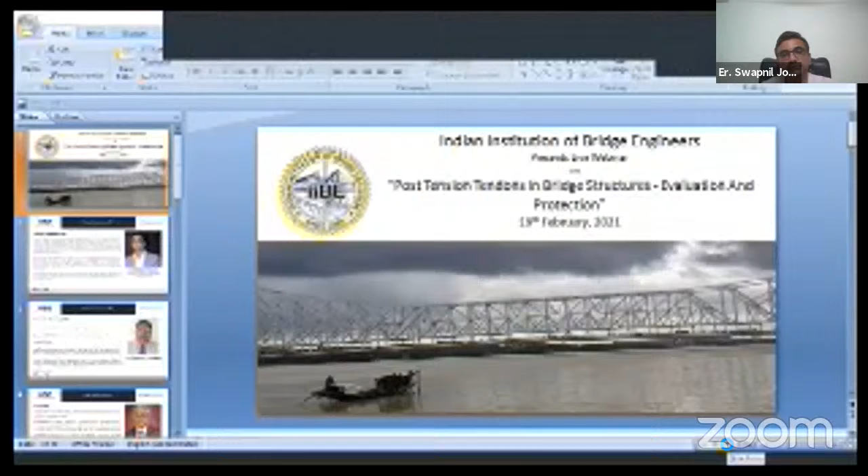So fine, Dr. Pillai, what's happening on the epoxy bars? Sorry, who are you talking to? Dr. Pillai, yes sir. What's happening on the epoxy coated bars? We don't want them, sir. No, there is a fight going on, Vinay. I know, you're telling others. What is it, actually? It's what to do, I don't know. We need to make sure the material we use is of good quality.

Thank you, Swapnil. I hope I am audible. Yes. Okay, so a very good evening to everybody, thank you for taking out your time, joining us, and encouraging us, I must say. We are having a lecture on a very important topic, which you will all hear from Mr. Shah. But before that, a few facts about IIBE. It was established in 1989 by engineer MC Bhide, who retired from railways as chief engineer, and he took the member strength from 1989 till about recently, till when he was alive, to almost 7,000 members. And we are continuing it further. His dream was to disseminate knowledge in the field of bridges, and we are all trying to continue with his dream. He also wanted to have an office of IIB's own.

So also we are purchasing an office here. Over this tenure of about 31 years now, there have been, at the peak, about 38 local centers of IIBE, apart from the head office which is in Mumbai.

There are some 29,000 pages of technical literature that has been put online. IIB has a full-fledged website.

It has a payment portal, and all these upgradations to the IIB have taken place. Apart from that, some of the centers may not be active, but one by one, centers are being reactivated.

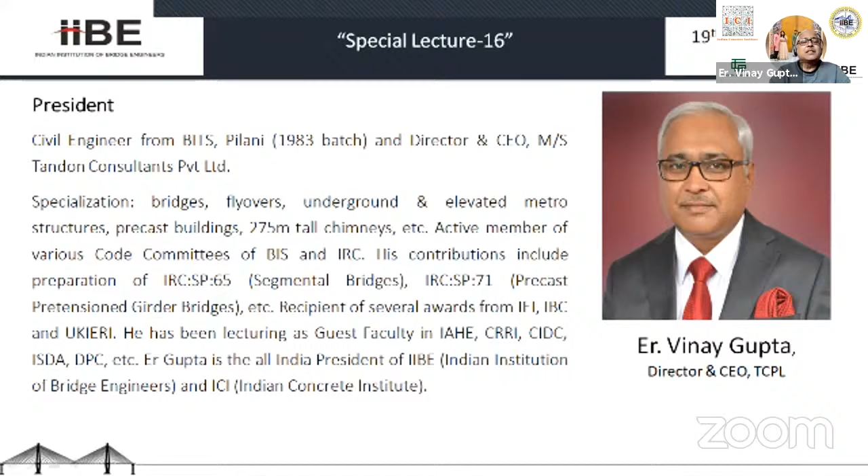For example, recently, in fact today only, I received a request from Chennai Center. Dr. Rajgopalan mentioned that he was honorary secretary, and later it was picked up by Dr. Srinivasan. Now we have to reactivate with another honorary secretary and local chairman.

Recently, we reactivated Hyderabad Center. So likewise, every center which has been in existence must come back in existence. That is the basic forte.

The major events of IIB that we have now, one is that we are planning to have awards. Towards the end of this year, we'll have an award function.

Apart from that, we have one major event, a mega event of IIB called Bridge Year. We had Bridge 2018 in Lucknow, Bridge 2019 in Patna, and Bridge 2020 all over India online. Now we will have Bridge 2021.

Let's see where we organize it. We are just deciding about it. And of course, the awards function.

Apart from that, we just picked up this good trend and new hobby of having online lecture series, special lecture series, let's call it. And today we have the 16th one of that.

I'm very thankful to the speakers, to the panelists, to the moderator. We have a very enthusiastic team here. My special thanks go to my two main pillars, the Honorary Secretary Engineer Swapnil Joshi and Dr. Gopal Rai. And the two backbones are Engineer Lawyer Ruhi and Engineer Deepika Singh, who are holding the post.

And we, of course, come in just to show our faces and speak out a few words. That is Mr. Devte and me, both. But anyway, everybody is required, it's a complete team that is needed.

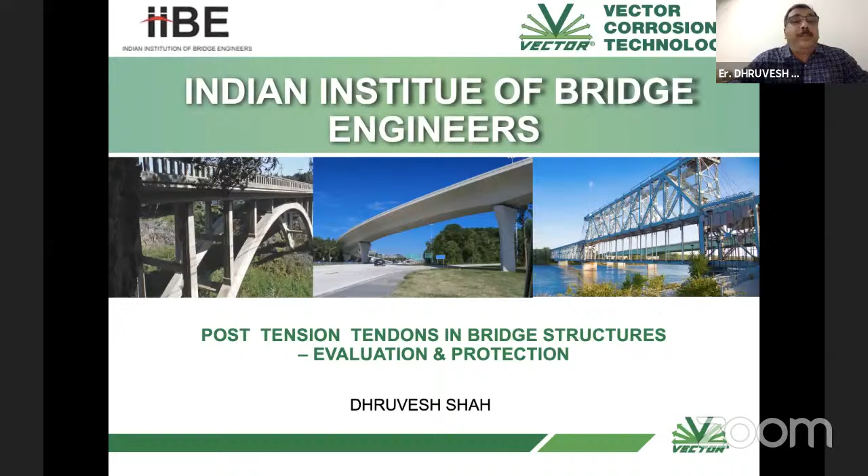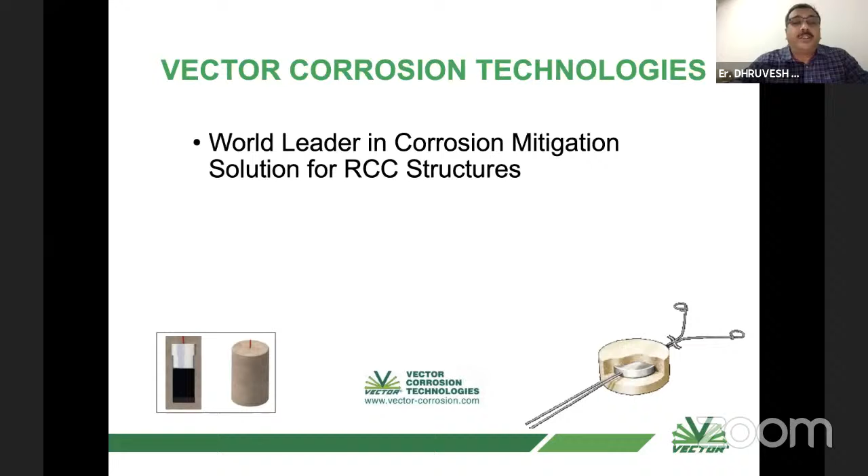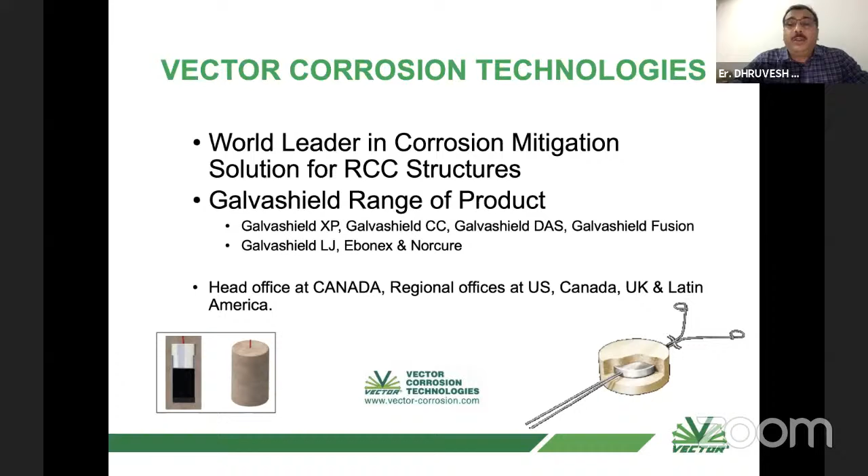Just briefly about Vector Corrosion Technologies: we are a world leader in corrosion mitigation solutions for RCC structures. Our products are the GalvaShield range of products with various sub-names. We have offices in Canada and regional offices in US, Canada, UK, and Latin America, with a distributor network all over the world. I take care of India business, mainly business development and technical support. We have two distributors who cater for supply and special assistance at site: one for North India and West, and TradeWinds from Chennai, that's Dr. Rajendran, High Tech, catering for South India and the eastern part of India.

Vector is highly involved in advancement of technology within our industry through representation in international industry organizations. That's why when it comes to IIBE presentation, I proactively asked Jyoti to please arrange the lecture at a suitable time, and it's good that this is happening now.

What today's lecture covers: the photo might not be too sophisticated, but it shows how you can evaluate and protect, and what the process is, how it can be done. My whole presentation will cover evaluating grout condition and detection of voids and soft grout using NDT methods, a little bit of history and development of the post-tension implication process, and protection of segmental bridges and other post-tension structures.

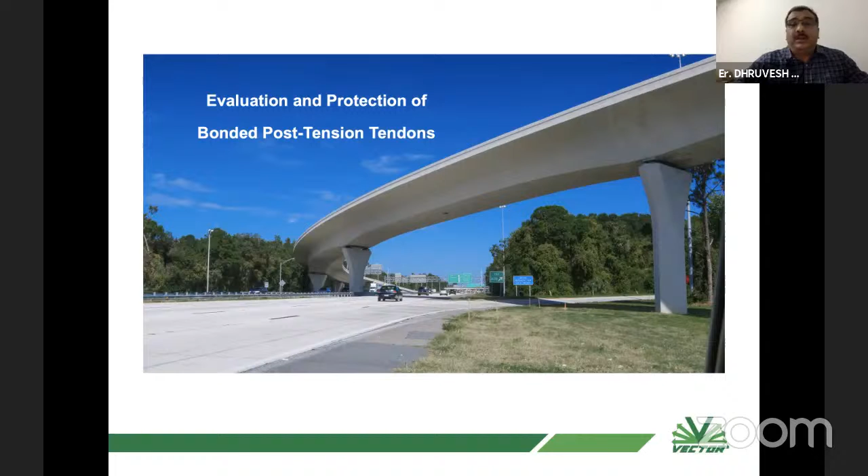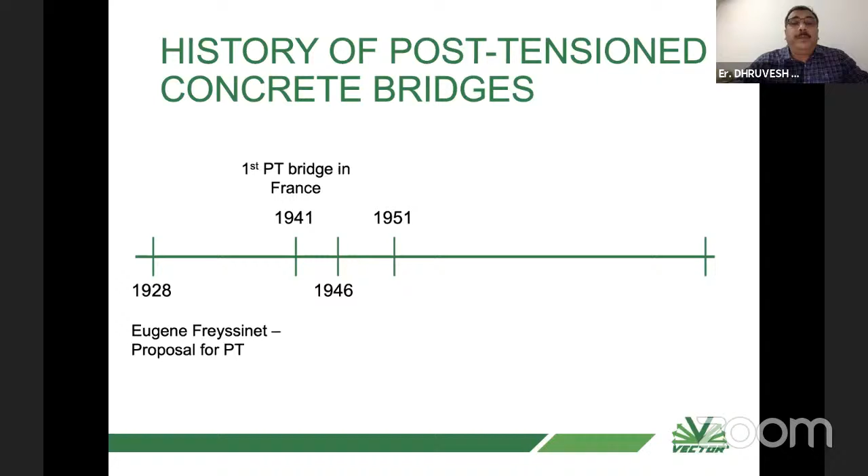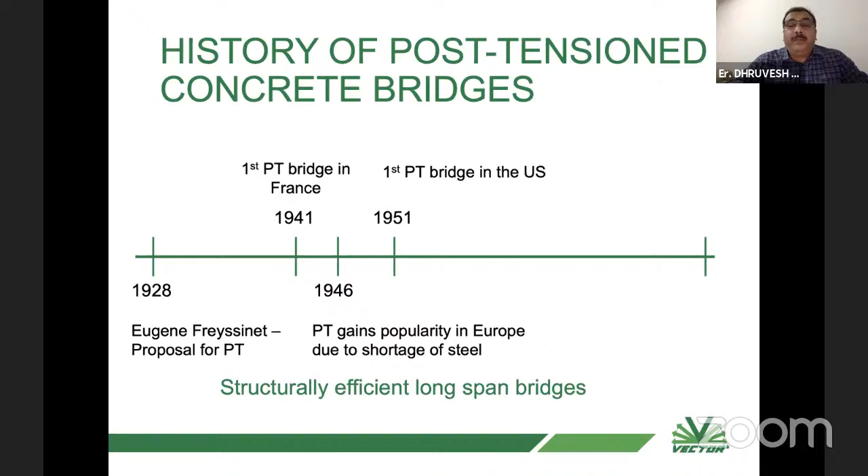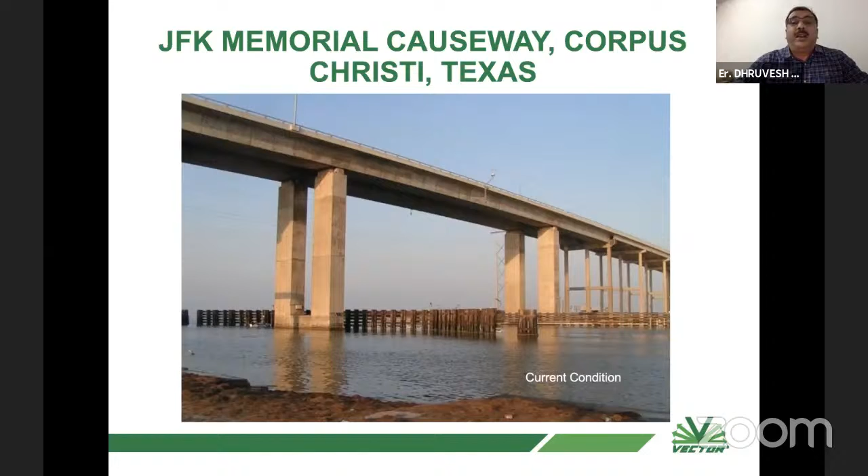Then it was used in abundance, mainly because for long spans it's very convenient, more value-engineered, fast construction - it can be a good and sufficiently efficient long span bridge. This is the first segmental bridge built in USA in 1973, and this is its current condition. When our vector team at North America got able to see one of the ducts, the grout was found well grouted on the PT tendon with no corrosion. Imagine, grouted in 1973, and it's still in good condition.

Mainly, what are the issues in PT grout? Whenever you have post-tension grouted tendons, there can be voids and water. You can see this water coming out from one of the PT tendons, shown in the right hand side picture. This is because there can be incomplete filling of the duct, grout leakage before hardening of the grout, and grout bleeding and evaporation, which may be up to 3 to 5% of total grout volume.

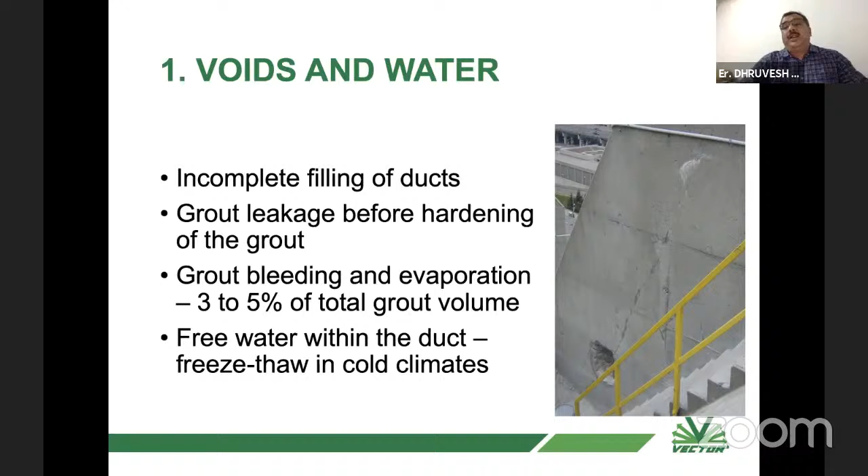This is found if it is a cement water grout - this percentage could be there. But I had come across cases in India where the percentage of voids are even far more than this. And when free water is within the duct, freeze-thaw in cold climates or other conditions creates further issues with the tendons. There can be a variation in grout property.

While pumping the grout, if you have excess water, there can be segregation, and the bottom dense portion will have more hardened grout than the top portion. There can be a variation in pH, a variation in density, porosity, chemical composition - various reasons are there because of which you have different characteristics of grout.

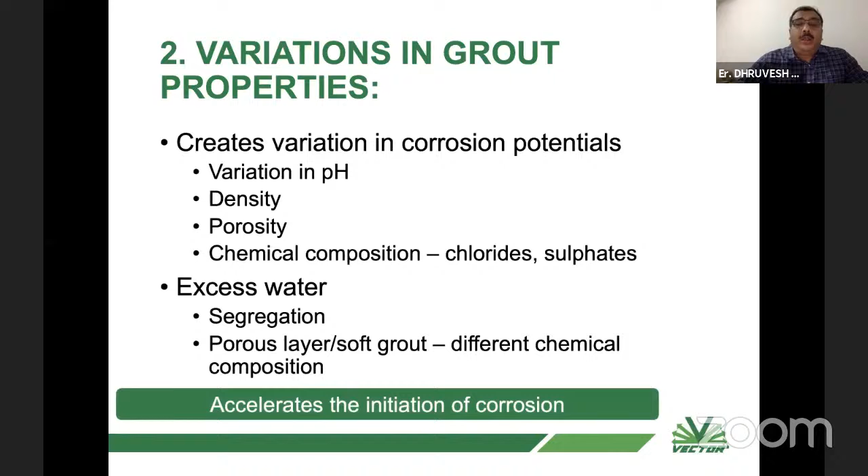And if there is moisture presence of more than 5%, definitely it's going to corrode. There will be corrosion, maybe of the tendons, maybe of the sheath, or maybe of the grout, which is not dense material at the top side, or if it is on the lower portion of the tendon. All these reasons accelerate the corrosion.

You have chloride contamination - we come across various places, particularly in Mumbai or in Chennai where seawater is nearby, because grout is least concerned by people, and simply at the end of the job nearing completion, local labor, not even semi-skilled, will be asked to mix cement and water and do cement grouting. Although this is not the process everywhere, the water which has been used has hardly been tested. If they find it has a lot of chloride contamination, then it's a disaster. We have come across many sites, at least 4 places, where this has happened. This chloride contamination in grout may be because of contaminated mixing water, or the grout itself has chloride contamination.

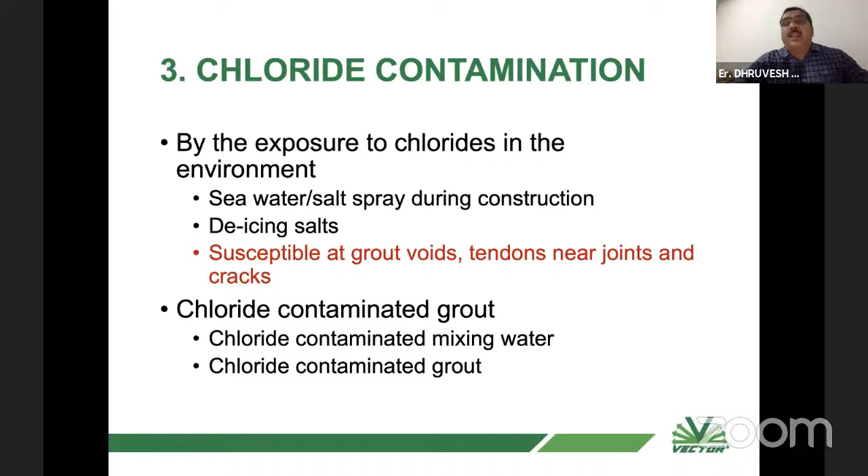Apart from the void, this picture shows segregation, like defective grout. If the grout has more chlorides or sulfates, the lower end appears very dense, while the upper end has voids, or may be fully grouted but with segregation, so the top portion of the grout cannot protect the upper strands or the underside of the sheath from corrosion.

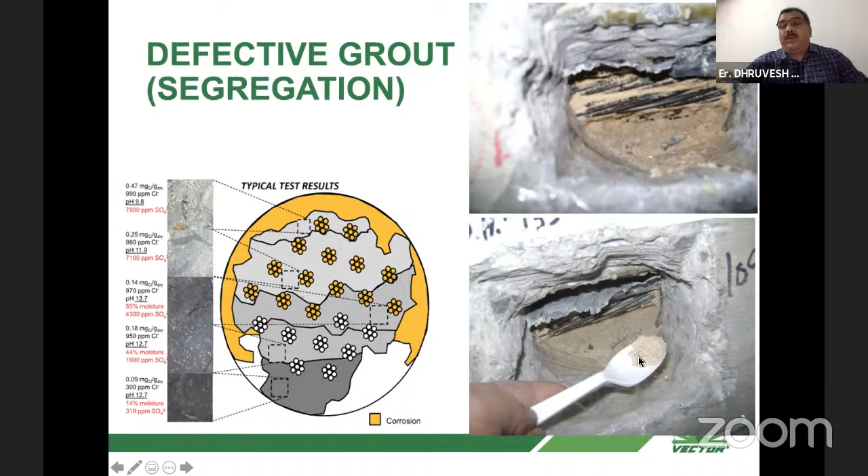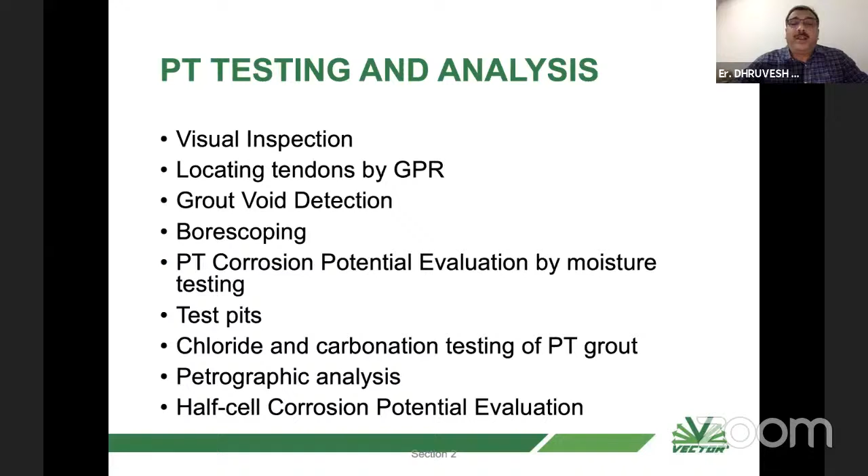So if we have grouted tendons with issues like voids, segregation, or moisture remaining due to bleeding, how do we test? Various methods exist, which I'll cover one by one: visual inspection by opening, locating tendons by GPR, grout void detection, borescoping, PT corrosion potential evaluation by moisture test pits, chloride and carbonation test, petrographic and half cell potential evaluation.

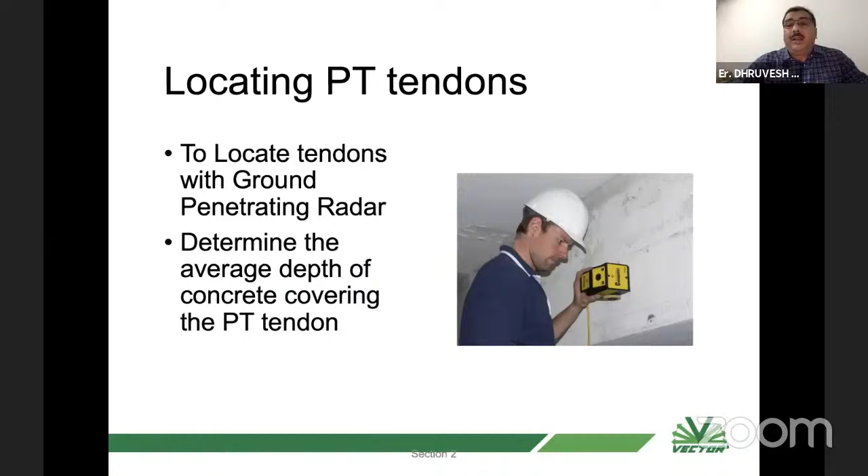You can use the impact echo sonic ultrasonic evaluation method, developed by Vector itself. We use an impact probe, and this equipment takes the readings as sonic ultrasonic sounds received by the probe. Depending on the frequency, we can find out whether voids are present in the tendons. If there are voids, the frequency will be less; if the grout is dense, the frequency will be higher.

So first you need to locate the tendons, then use the impact echo sonic ultrasonic evaluation method. If you have say 1 kilometer of total tendons, you can evaluate using a localized step-up method to identify the positions where voids are present in the PT strand.

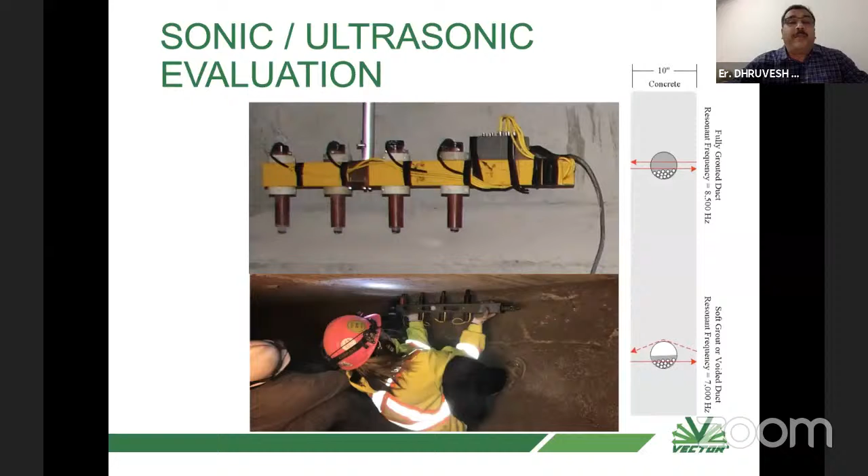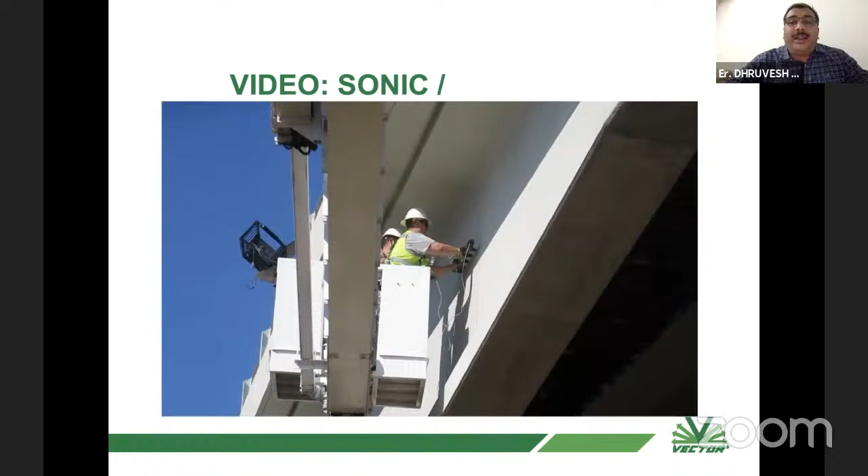This method will definitely give you voids, soft grouts, and water if present. Here is a small video showing how it's used. It looks very simple: the left hand side person impacts, and the right hand side person moves the probe, with readings taken on the equipment as he moves along the line of the PT tendons.

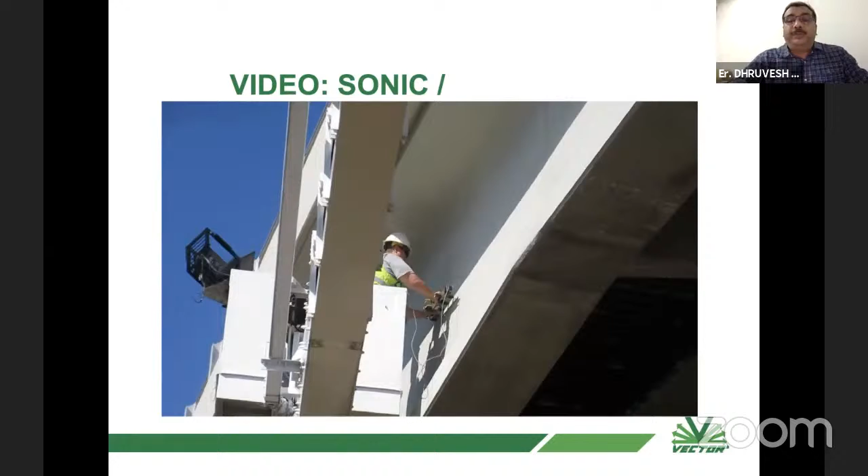Once we detect the voids this way - this particular bridge, a small walkway bridge, we detected a void, then cut open at that location, which confirmed there was indeed a void inside the sheath.

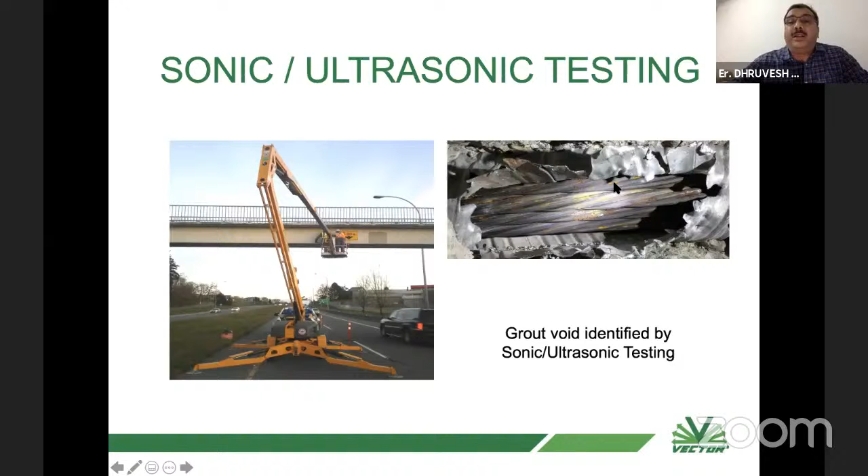Once you detect where the voids are, you can simply make a small hole up to the sheath - don't use a drill to puncture it, just use a sharp tool or screwdriver to make a hole, hardly 1 inch, and insert the borescope probe inside to get a good view of the condition, even recording video of what's inside.

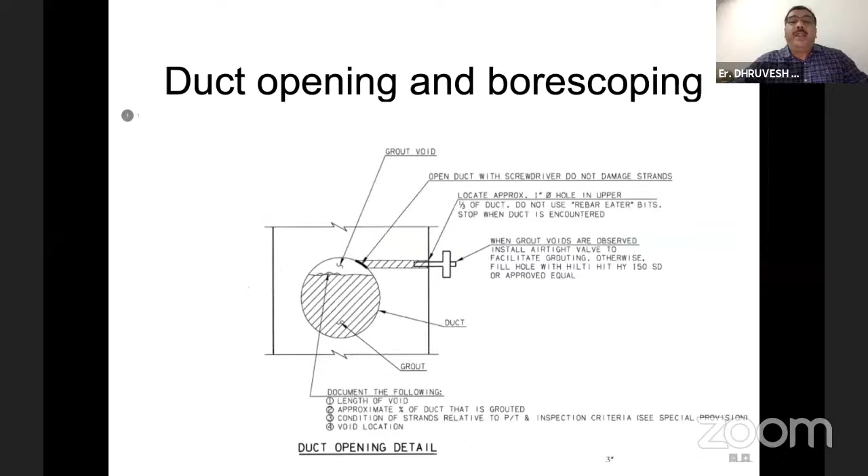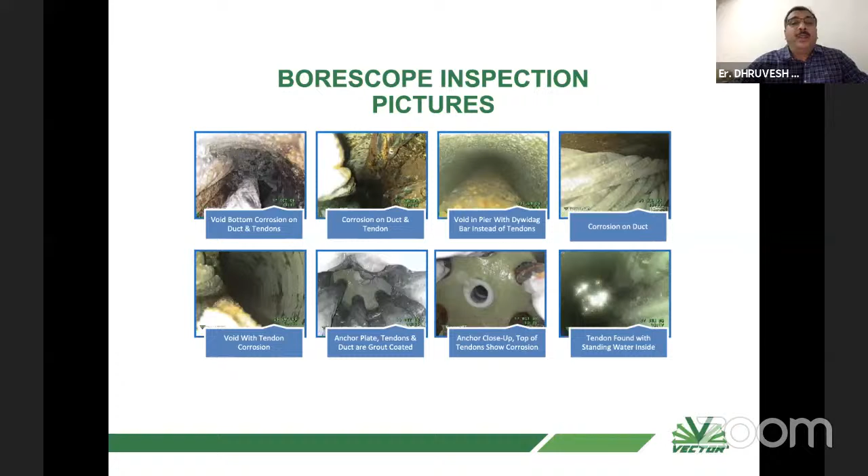So you can identify the tendons, use an impact echo test to find the location of voids, then insert the borescope to get pictures and know the condition. Let me show you some examples, starting with the Sunshine Skyway Bridge, Tampa.

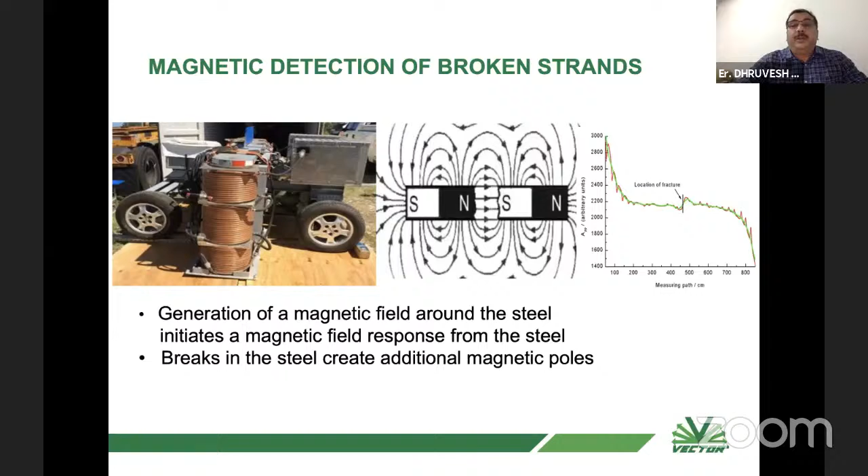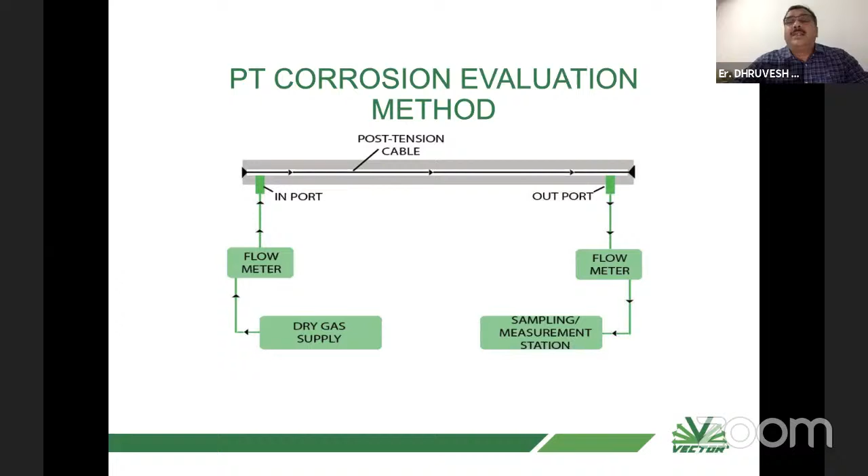One evaluation method to know where moisture is present is what we call the PT corrosion evaluation method. We select a tendon, simply puncture at one place, and insert a port. There is a flow meter and a dry gas supply. We supply the dry gas, measure what goes inside, and at the other end, the output gas comes out, and we measure the moisture content of that gas, which shows us the moisture level inside the PT tendons. If the moisture is more than 0.7%, it is considered wet and a highly corrosive condition.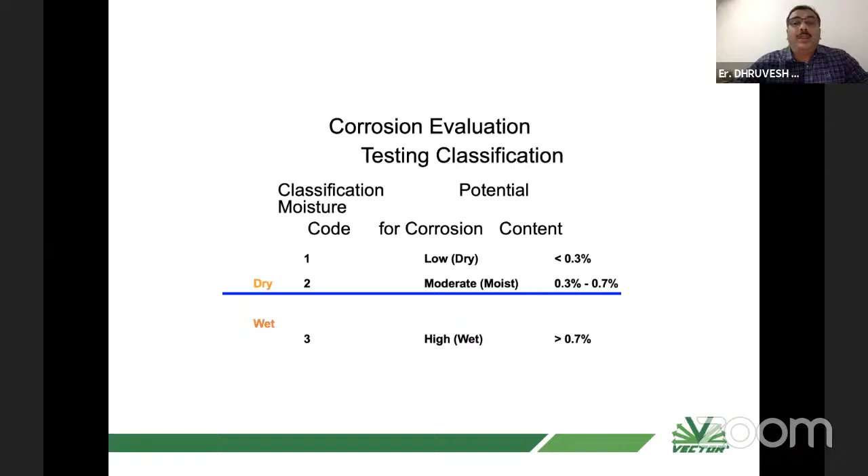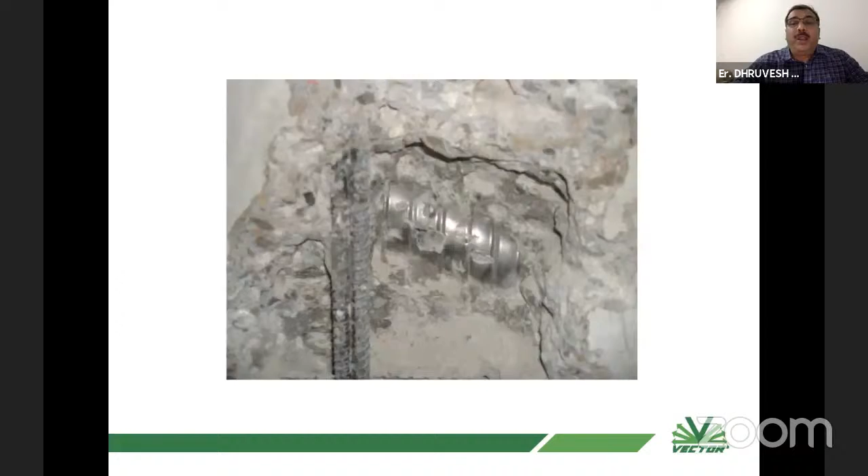This is one bridge where we tried to do the moisture test by passing gas from one side. It was sealed and small dry gas was injected inside, and the sheath was opened up. This is actually a video, I couldn't run it, I don't know why, there is some issue. You can see moisture and water coming out, so we can visually see that moisture was really coming out from the other end.

Dhruvesh, I think you can play that. There was a button at the bottom left. It's not working, it says file not found. I don't know where. No issue.

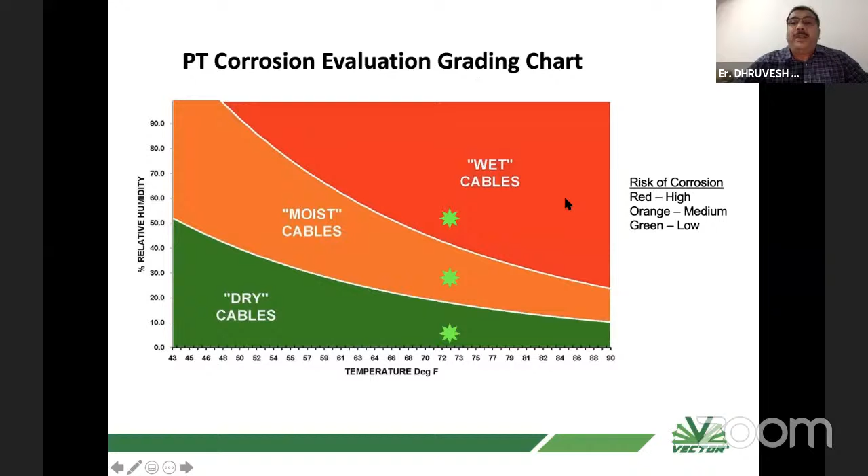Then we chart it at a particular temperature and relative humidity, and categorize it into three different parts. If you have a certain temperature in Fahrenheit and your relative humidity is found less, then you are in the safe zone. But if it's a little more moist, then you are in a medium risk zone. If your moisture content goes high along with humidity, like moisture level maybe 0.7%, then it's bad, corrosion is going to happen to your tendons, and it's a high risk zone.

Actually, if you could use that pointer, it will be clearer. Sure, this is one of the places where I was there. The bottom, you'll have the red color pointer, no? Yes, lesser.

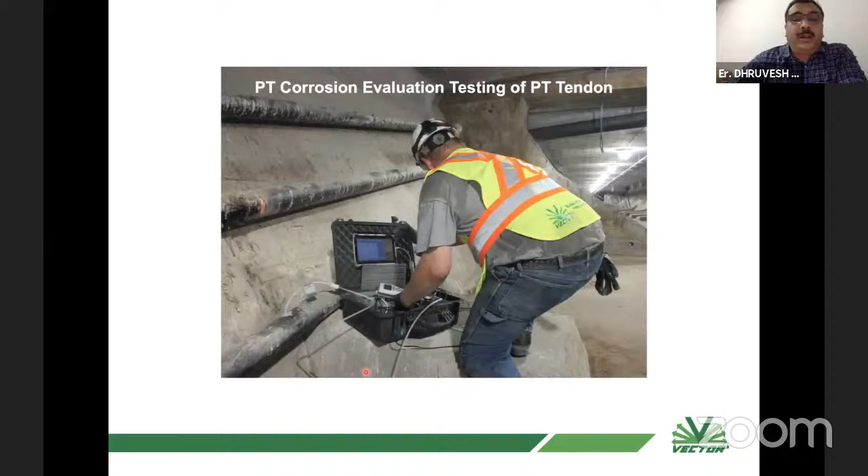This is a view of a bridge in Virginia, where I was there and had been part of checking the evaluation and then PT implementation also. Here, this is the port, this is the point where drilling has been done, and then a small pipe has been put and connected to know the moisture content, and dry gas has been injected from the other side, and we are measuring the flow and the moisture content. At that particular bridge, we found that most locations had very high moisture content, and when we broke it open, we found that the tendons were really corroding.

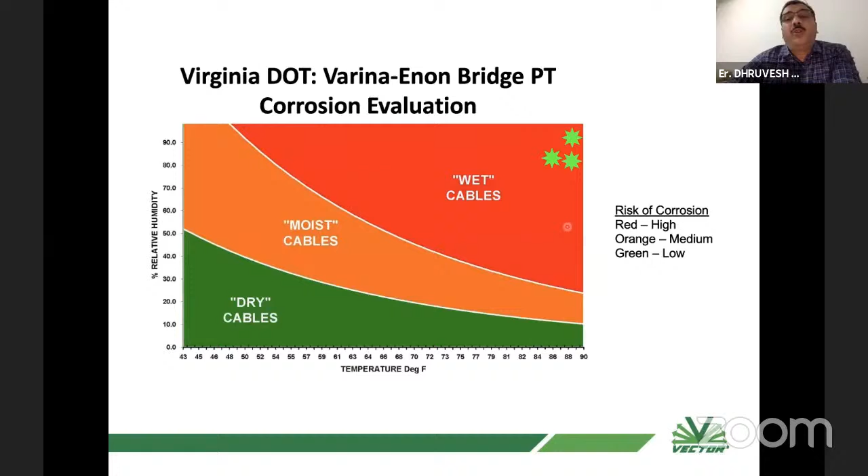So it's directly related to the moisture content in the grout. High moisture increases the corrosion rate, while low moisture content keeps the corrosion rate low. You can do drying, and this can be used for unbonded tendons also. In unbonded tendons there is no grout, it's all void, but if there is moisture, it will definitely lead to corrosion. So in case of grouted tendons or unbonded tendons, you can do drying of the duct.

It is similar to what evaluation we can do. You can have a duct puncture at the middle or at the end, depending upon feasibility at the site. Then you can supply a handsome amount of dry gas, measure it, and keep pumping the dry gas until you get a desired level of moisture. This means pushing all the moisture out of the grout and the voids also, making your entire tendon dry. It looks very simple, but it's a bit complicated.

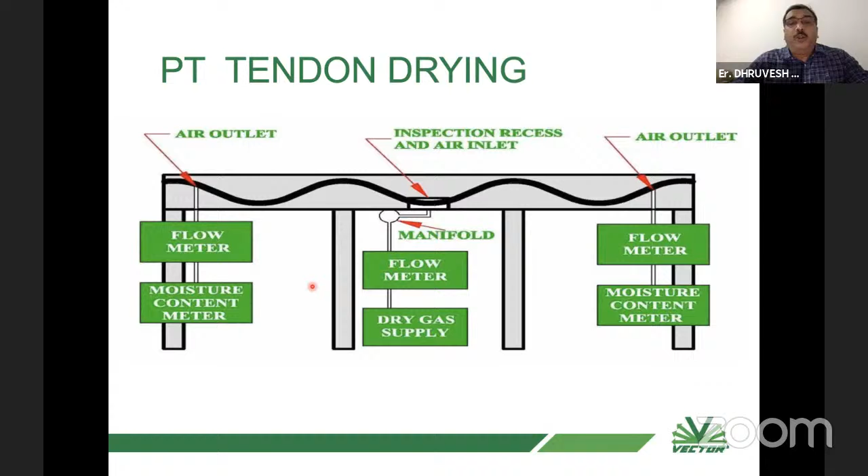Complicated in the sense that this is an arrangement somebody has to set up. You cannot use a simple cylinder or nitrogen gas or a balloon gas for that, which you can use for evaluation. But when it comes to the drying process, you need a huge amount of dry gas to be pumped. So you need a plant which can produce dry gas. You can have a compressed air compressor to produce gas, then a dryer, and you need to see that the dew point of the gas is around minus 20 or minus 30 degrees. So you have absolutely complete dry gas which needs to be pumped from one end, and you have to keep monitoring for maybe days, weeks, or months, because it depends on how dense the grout is, how the voids are, and what's the percentage of moisture content, because we want to push all the moisture and water out of the tendons. That's the way we can do the PT drying process.

This is another location from where the moisture has been measured. You can do it manually, but here we are doing it with more sophisticated equipment, which measures how much moisture is there from each of the tendons. They are all connected, and we can record the moisture level.

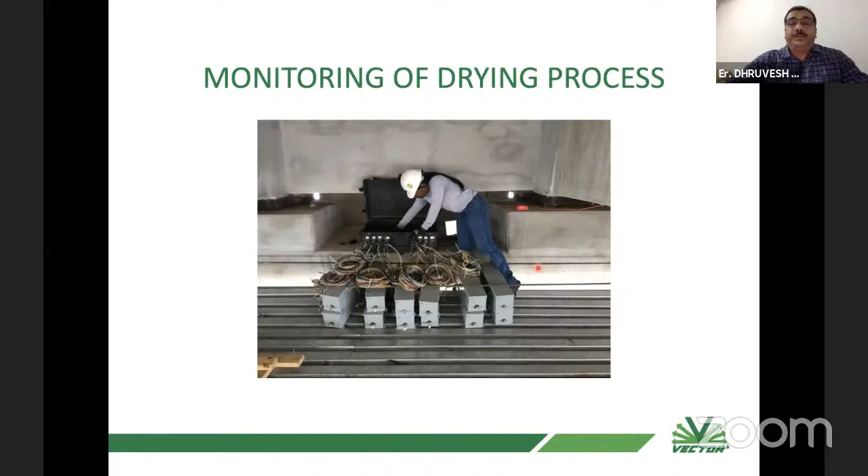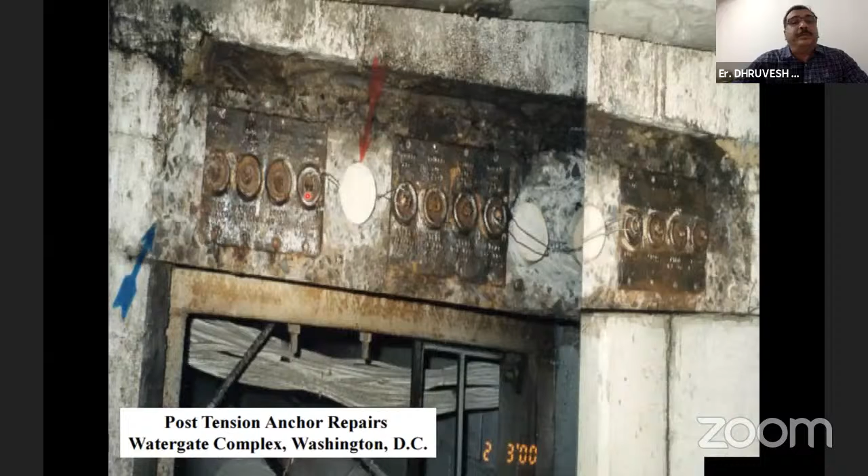So if you can break open the pour-back concrete, you can simply use a normal sacrificial anode tied to the strands, and then fill back with concrete. The concrete will act as an electrolyte here, and it will protect your end cap from corrosion. This case cannot be 100% good for the strands, because you won't have 100% electrolyte, and the space is constrained. Now, when you know there are voids, there is ongoing corrosion, and it is detrimental to the structure, you want to protect the structure and the strands from further corrosion. Obviously, I cannot reverse the corrosion, but we can still retard the corrosion rate, so whatever rate is there becomes 100 times less. So definitely it will enhance the durable functional life of the strands.

The corrosion protection process for grouted PT tendons with voids or defective grout can be done with impregnation material, which is transported from inside the strand for the full length of the tendons. It may be 20 meters or 100 meters. I had done a treatment for 80 meter long strands without any joints. The impregnating material reduces corrosion by coating exposed steel in the voids and also improving corrosion resistance of the grout around the strands.

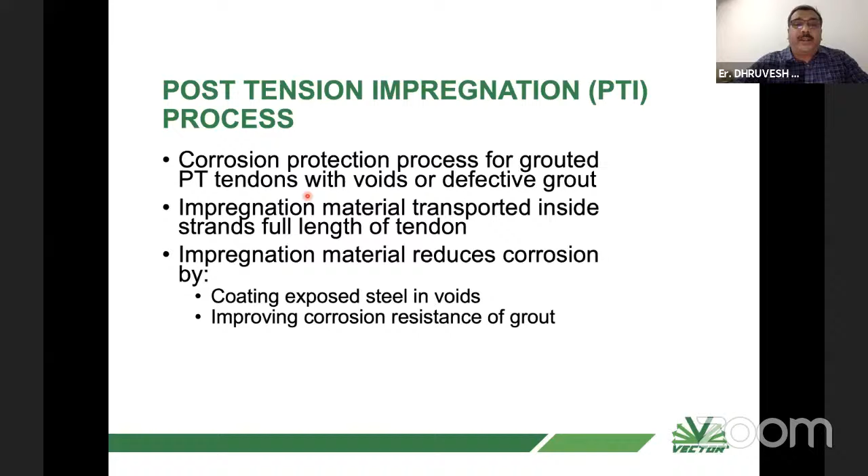This is how you can do impregnation. You can transport the material from either end of the tendons, like opening of the end cap. And if accessibility or feasibility is not there, you can decide to make a puncture or entry point from the center somewhere, in which case the impregnated grout will flow on both sides.

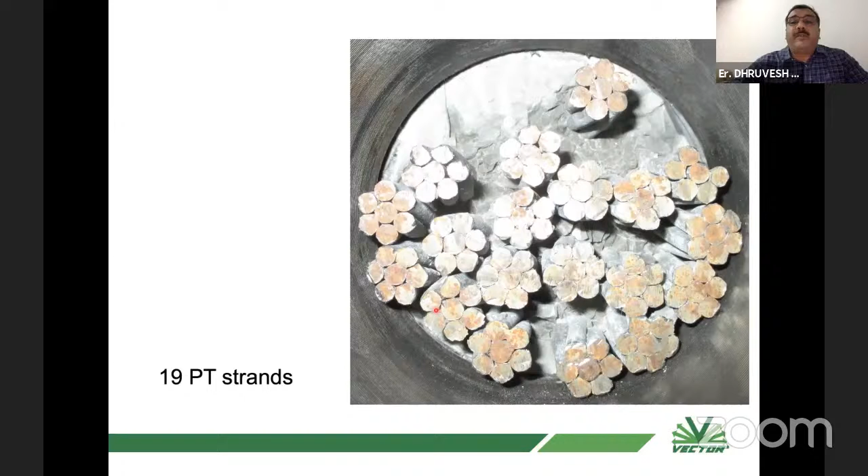It will depend upon the site condition, we have to decide. This is a particular tendon which has 19 PT strands, and each strand has 7 wires. The center is a king wire, surrounded by 6 wires.

These are 19 strands, and this is one strand. You can see the voids in between, called the interstitial voids, and these are in microns. So we want to use these voids and small gaps around the strand.

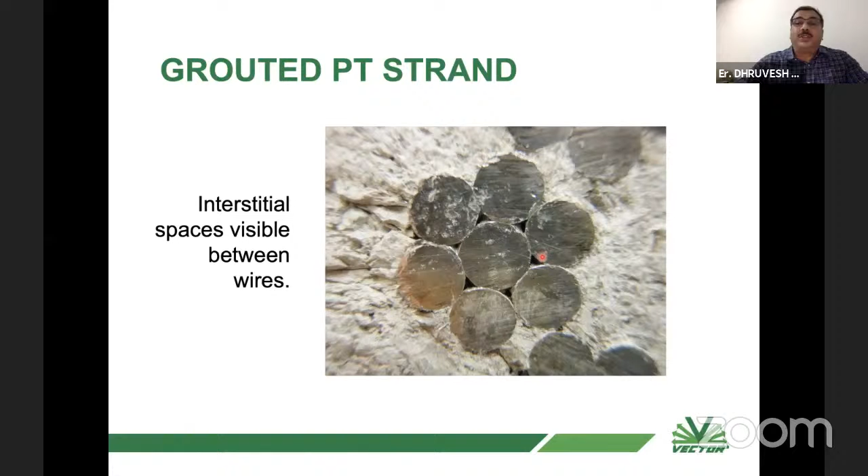You can imagine a 50mm or 70mm tendon having 19 strands, grouted. The whole 7 wires is hardly 2, 3, 4 millimeters, so the gap could be hardly microns. We want to inject material through this. I will show you with a case study.

This was first done in Florida DOT, Jacksonville, Florida. Fortunately, there were external tendons instead of internal tendons, but to know how it performs, full-scale work has been done on the external tendons. It has a PVC duct.

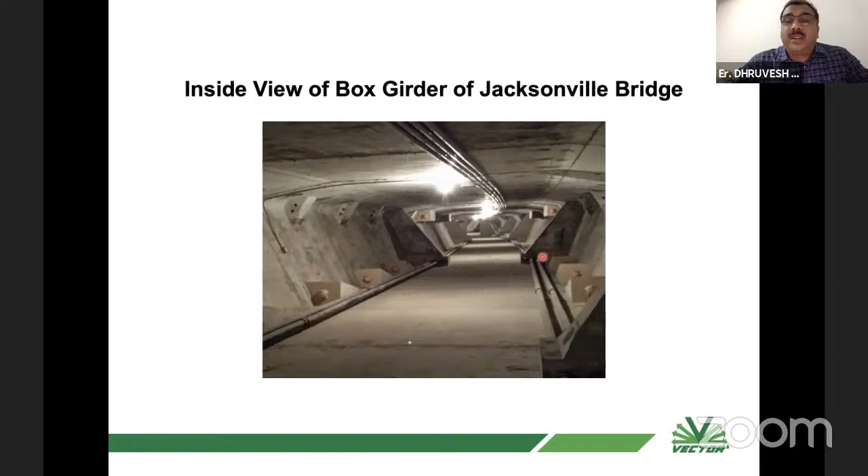What we did is we opened this plastic cap, removed the grout which was covering the strands, and this was how it looked.

Then we install a port, close the end cap again, and start pumping the impregnation grout. Once we started pumping, we went to the other side and saw that grout was coming from the lowest tendon and from the upper tendon. It had traveled up to 72 meters and was coming out.

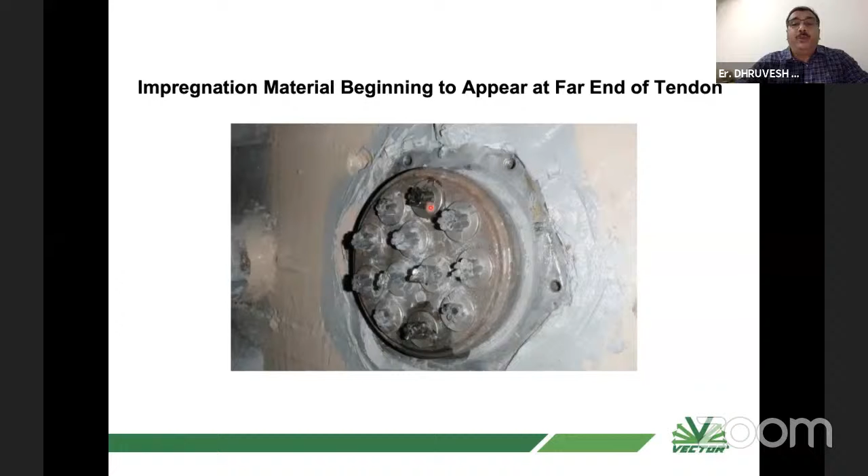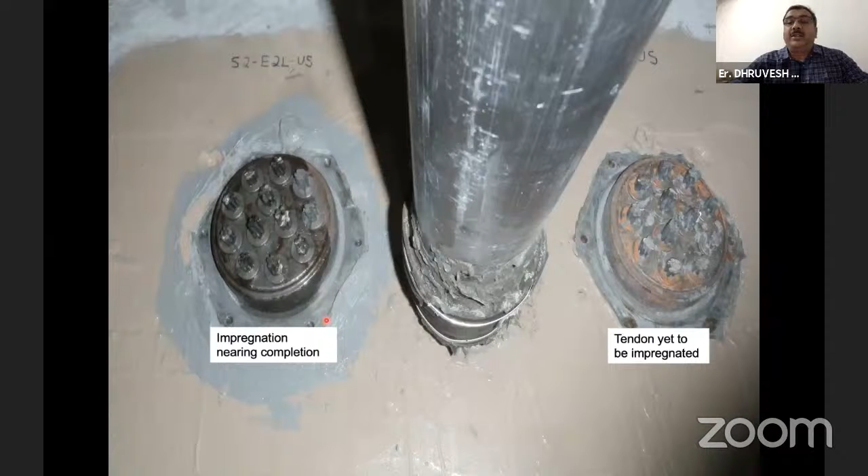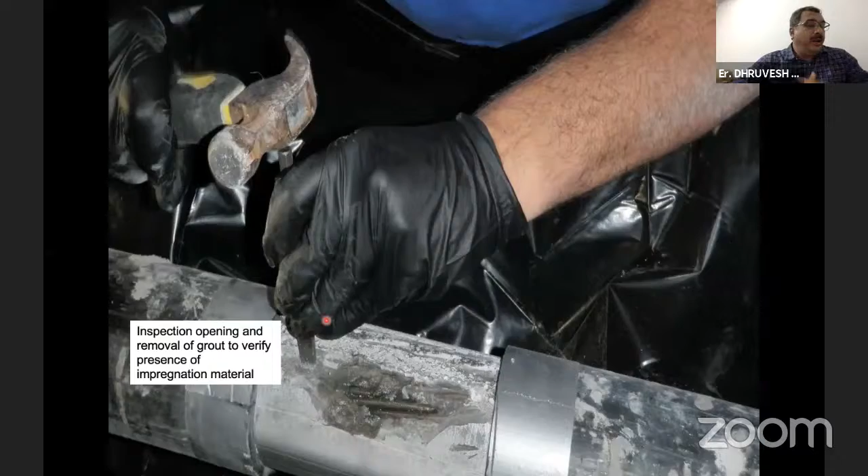Then to confirm what happened, we cut open at one place, and found that all the tendons are properly coated with this material. There was impregnation material covering all the tendons, filling the gaps.

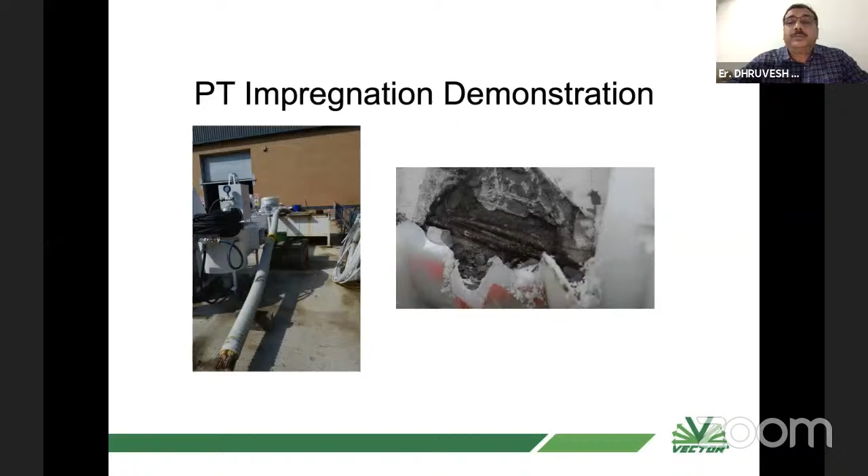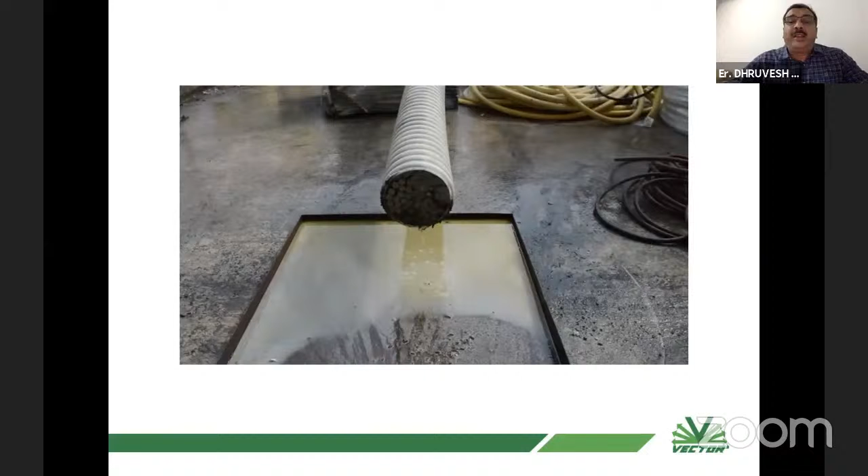And then we tried it for the end. You can see how much grout is coming out. Although this is 20 meters of length and it was coming with more velocity, even if it is 80 meters or 70 meters, the grout will still come. The speed may be less, but it can definitely cover entire places, whatever voids it finds.

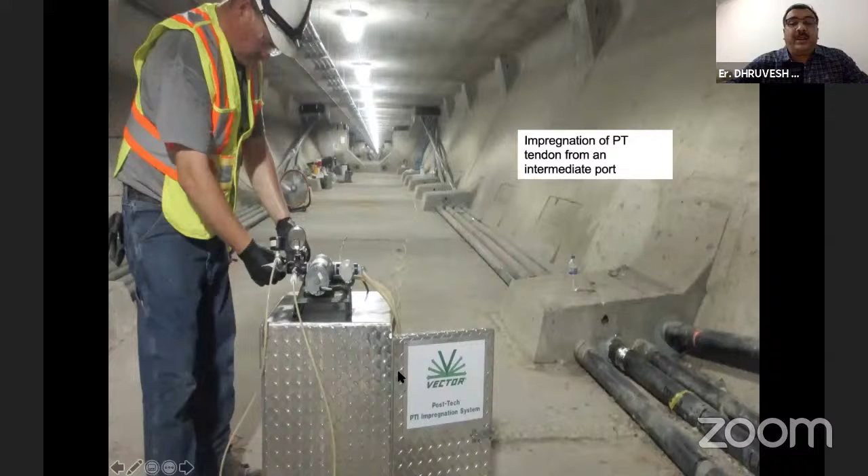So we do it from the center at other places. We drill the hole, fix the port, and this is the equipment we use, which has a source of grout beneath. We pump the impregnation material and check at the other end. You can see at the end cap portion all the cracks or positions where the grout is traveling, confirming it has traveled all along the PT strands.

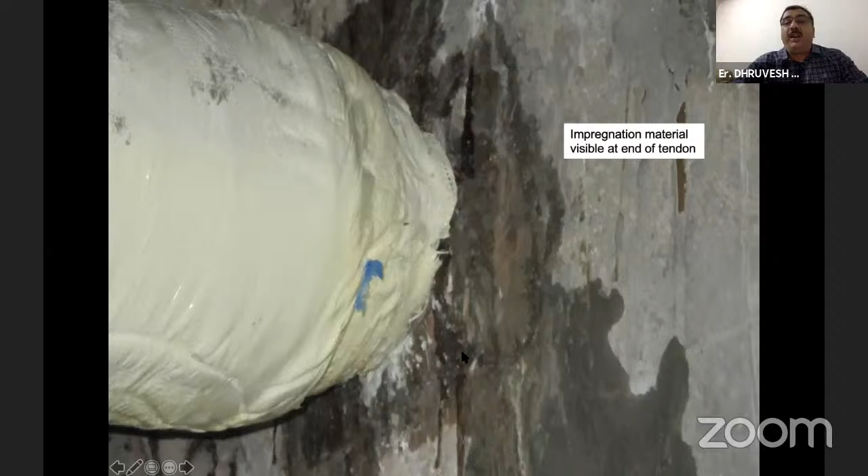This is the other end where there is a pour-back, end block, that also got some from the anchorage end and the complete pour-back. There was a gap, so the material is oozing out.

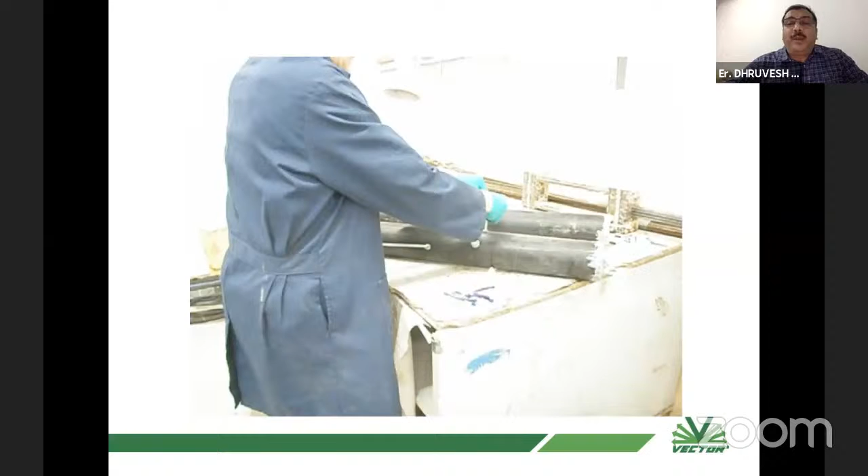We even tested this - there's a small video, not too sophisticated, but it shows that if we pump from the center, how the grout comes. We put the port at the middle and observed the grout flow. But as it is on top, the top one will have grout coming out, then from the bottom.

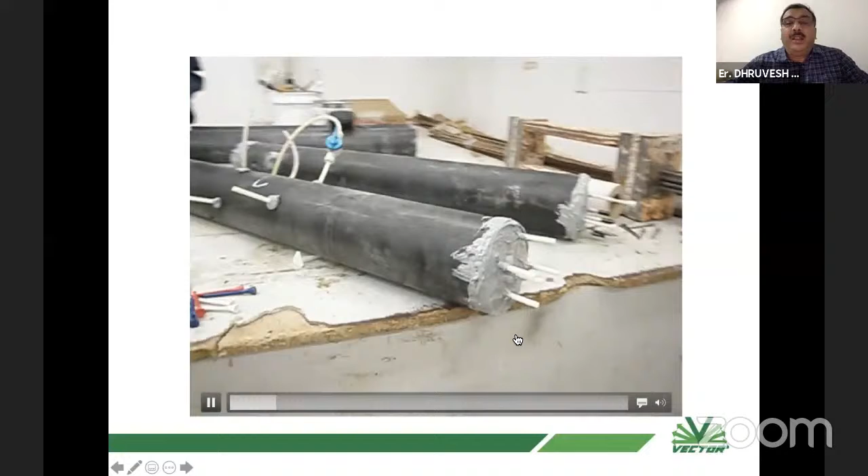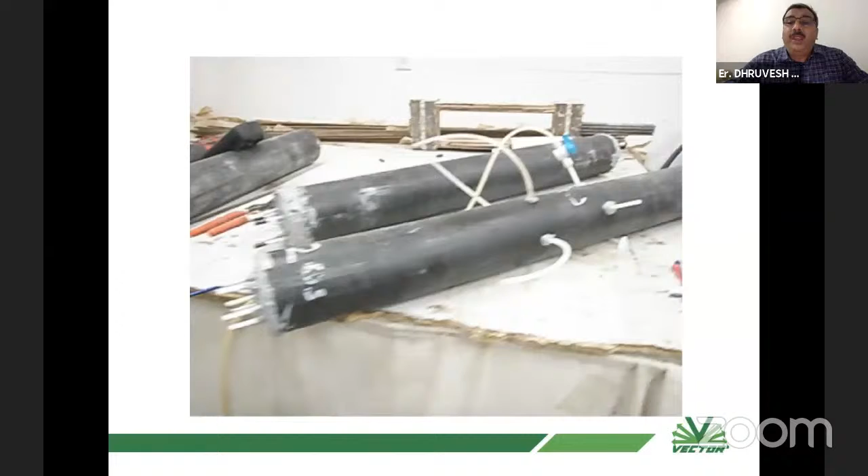Then we started plugging it with a special sophisticated plug - you can simply push it. It was designed as per requirement, and we simply plugged it. It started coming on from different ports, from different ends, and then we plugged almost all the ports. Finally, it will come out from the last downmost port from the other side, ensuring that the entire strand has been filled.

It will also saturate the grout around the strand, making it more corrosion resistant. So that way it's really working.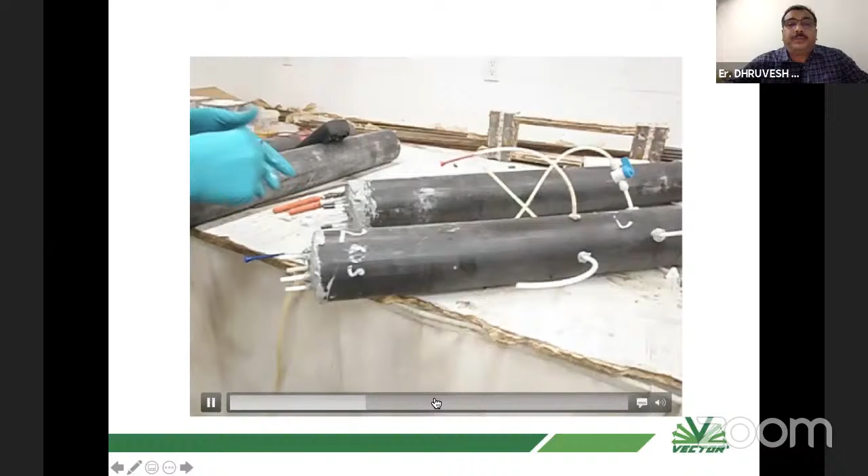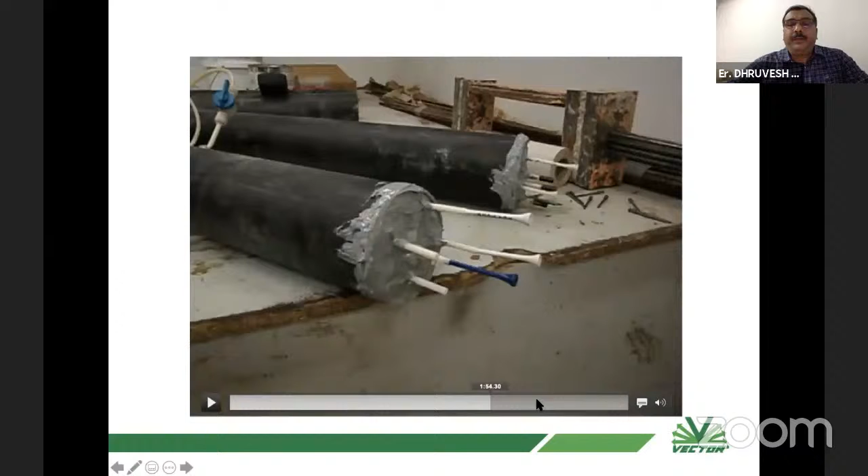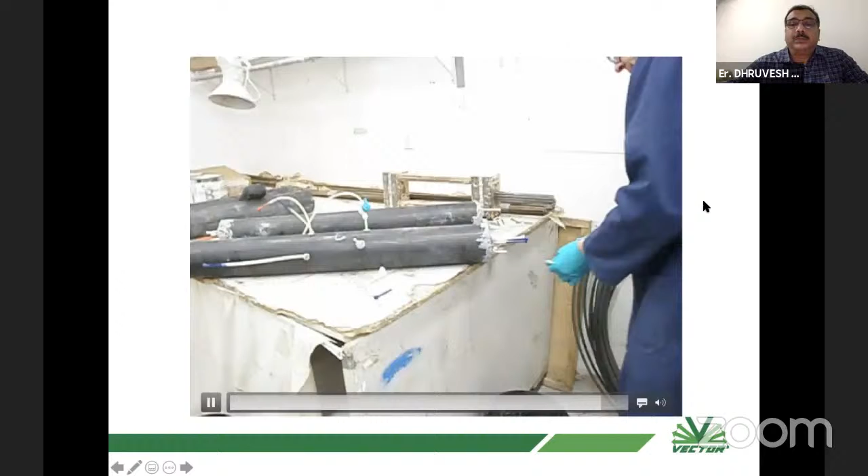We'll run it fast. Basically, it just shows the same thing, that it is plugging the things, and finally it will come from the other last end also, so that everything has been filled.

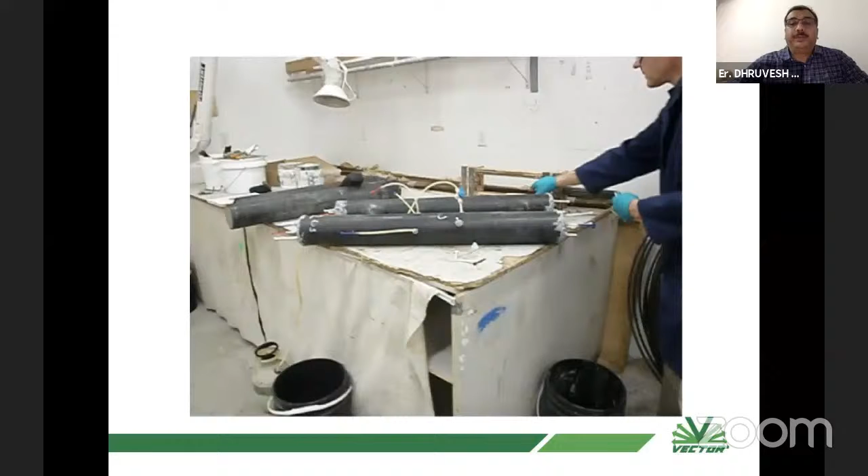Then we do the performance validation. We had a strand which is uncoated and untreated, and a strand which has been treated with impregnation material. We used a salt spray method and put them under salt spray conditions. We have a full report if somebody wants it. This is just to show what has been done. We found that the untreated strands were corroding, and there was no issue on the treated strands.

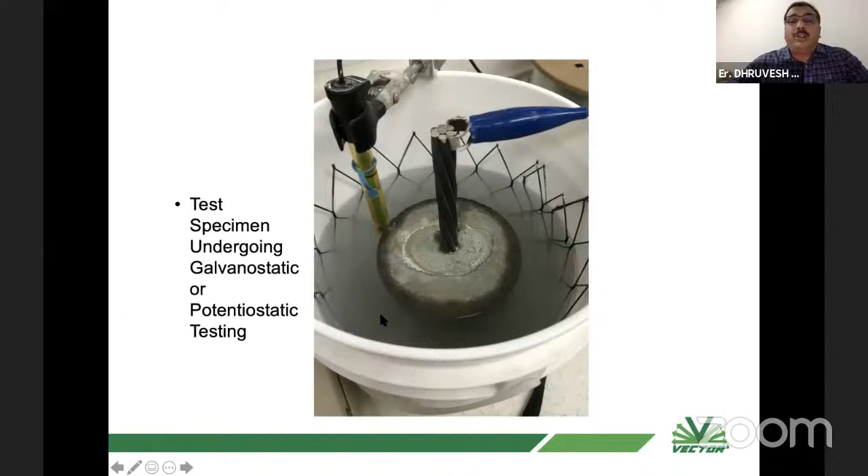To have a quantitative analysis, one can create a perfect concrete condition wherein there is a grout and a proper strand, and use galvanostatic or potentiostatic testing. If you are applying current, you use galvanostatic; if you are applying voltage or potential, you use potentiostatic testing. You connect one end to the potentiostat, and the other end connects to the external electrode, with a reference electrode also. With this whole system, the test was carried out, and it normally gives you the result of corrosion current.

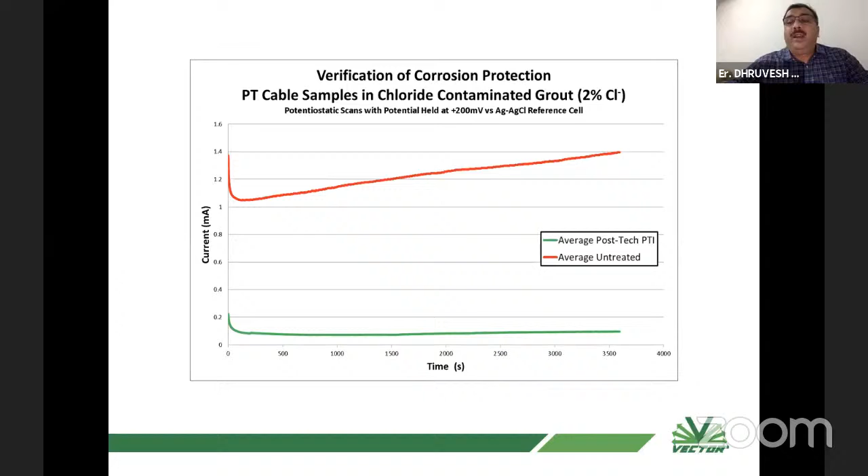It was found that with 2% chloride concentration, the untreated sample had very high corrosion current. For the treated sample, we were able to reduce the corrosion current to a very low rate. This shows the current was very less, it was protecting, there was very little corrosion. So definitely, the average Post-Tech PTI cable really works.

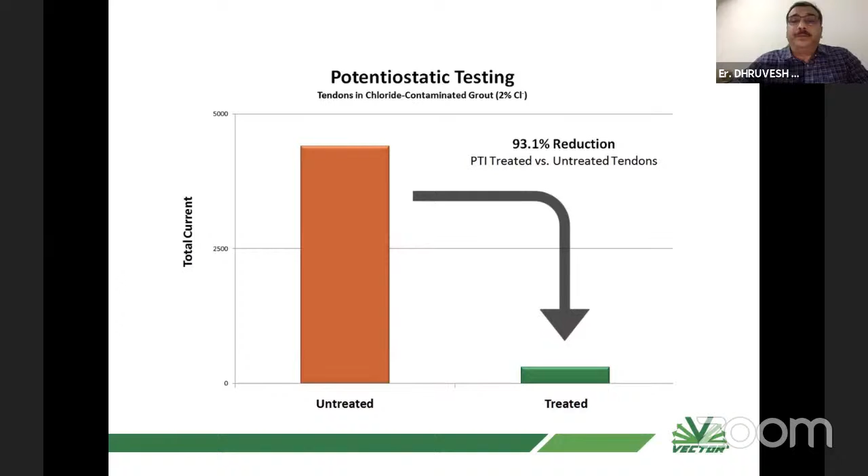When we quantified it, we found there is a 93.1% reduction. It doesn't mean it's simply a log percentage - if suppose I'm able to retard the corrosion rate 93 times, this is what I mean if you use this impregnation sort of thing. This shows the coulomb charge passed, where we also find a lot of reduction in the corrosion current. So it can enhance the life of your PT strands, and they will live a longer life without corroding.

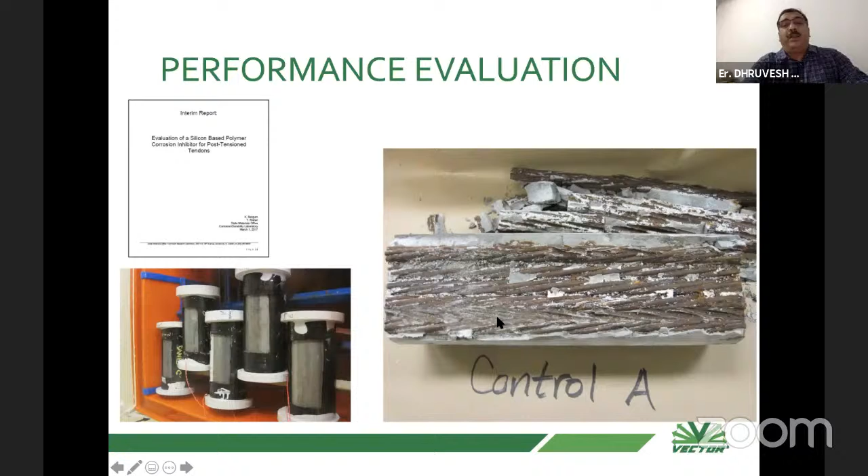Some authorities have used this and published a paper; an interim report was there, wherein the control sample was having a lot of corrosion, and these are the photos from the report only. The treated sample was not having any sign of corrosion - it was working wonderfully.

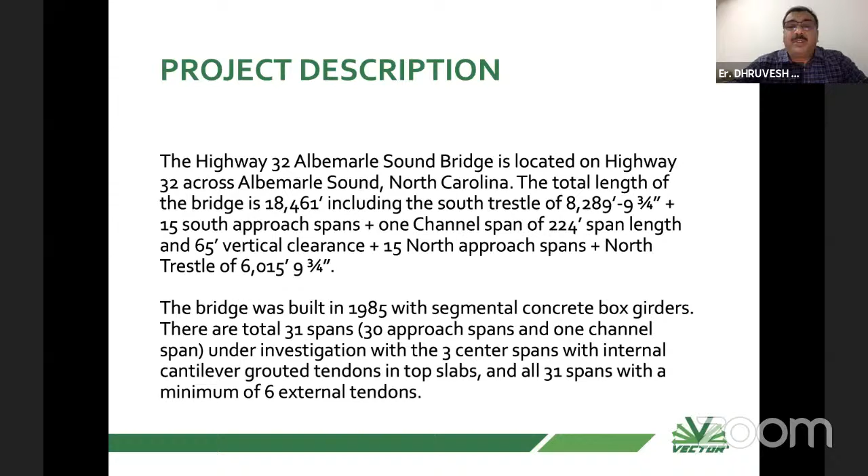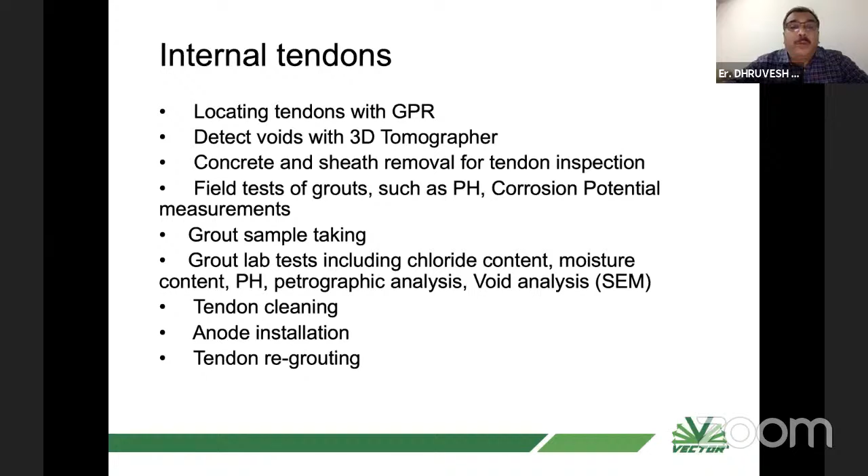This is one more case study I would like to show, wherein this highway bridge, which was built in 1985, had some spans. I don't want to go into much of the logistics, but the internal tendons were located using GPR, voids were detected, concrete and sheath removal of tendon inspection. We did all the tests - corrosion potential, pH, sample taking, everything has been done. In this case particularly, we found the voids and the accessible tendon were accessible.

So we cut it open, and we found there was a lot of voids, which can be filled with different grout - you can regrout the tendons. Yes, when you regrout the tendons, what will happen? There was a grout which had been lying there for many years, and the pH is different. It was an older thing, and when you regrout with very good quality grout, there will be a difference of potential around the new grout and the old grout.

So there will be a sort of incipient anode formation. It has been found that wherever at the periphery, like at the junction between the old and new grout, the top of the strand wires start corroding. So in such cases, when you have voids and two different grouts, the surface started corroding.

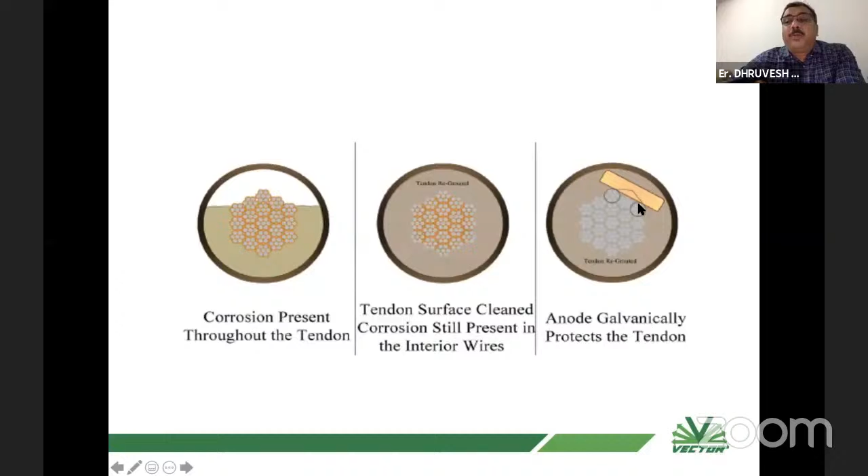This picture shows you well - there was a void which was grouted, and then what you can do is simply put a flat anode here. This is how it has been connected. So there will not be any incipient anode formation, and you can protect the entire tendons from corrosion.

This is what it shows, and this is how it can be used. You can simply put an anode—it's a flat special anode made for tendons—and then regrout and repaste all these things. So your void has been filled, and you can protect your tendons from corrosion.

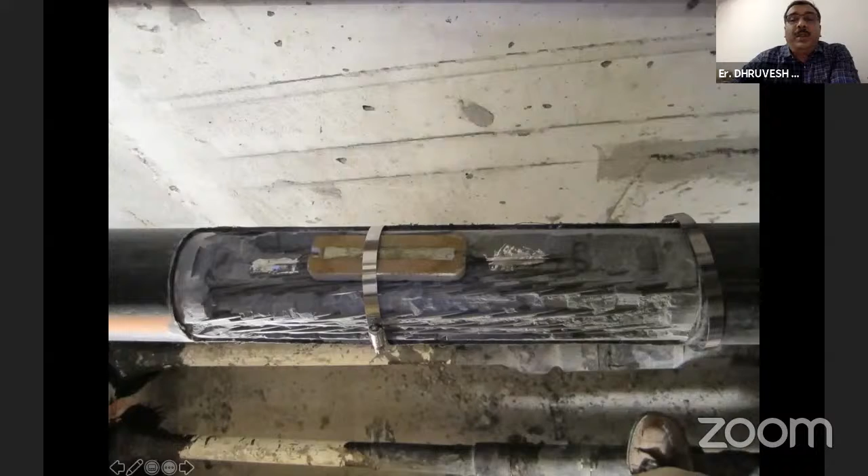Another way of protecting it: then you can seal and regrout it.

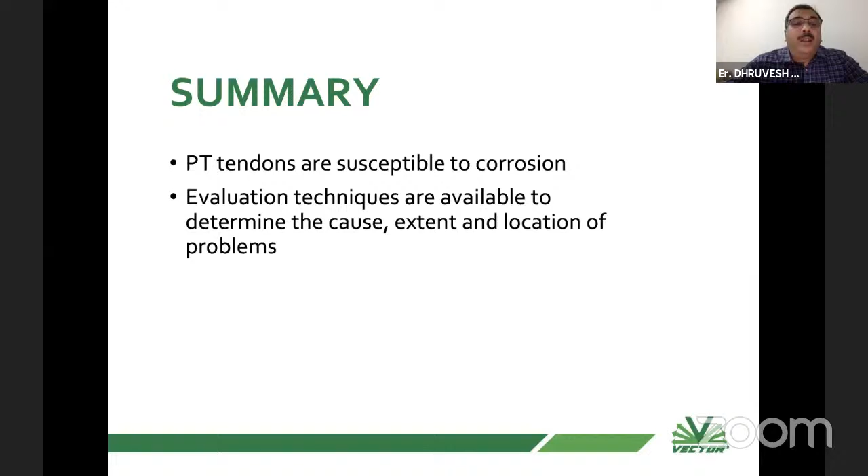So to summarize, PT tendons are susceptible to corrosion—yes, it's not that it cannot corrode. Evaluation techniques are available to determine the cause, extent and location of the problem, and corrosion mitigation techniques are available to protect and extend the service life of PT tendons in existing structures. We can help you out for any of your project.